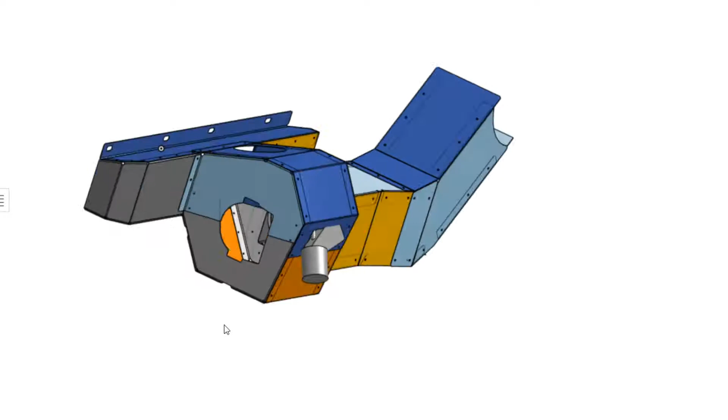There is a separate video on how to assemble or how to fold the tin for this kit, but it might be helpful to watch this video first and then have an idea about how to do that before you tackle that video with the individual pieces of tin and how to bend them. So let's look at this.

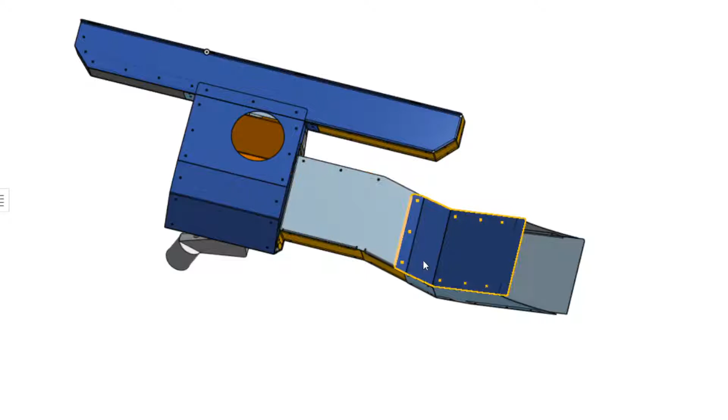First of all, we can talk about the orientation of this. If I'm looking on the top of this, I'd have the engine up above here, the valve cover. I'm looking down, the exhaust manifold for the machine would be located inside this part of the enclosure. The exhaust turbine from the turbocharger would be located inside this large box here. And then this zigzag pipe here is going to follow the exhaust pipe up to the muffler on the machine.

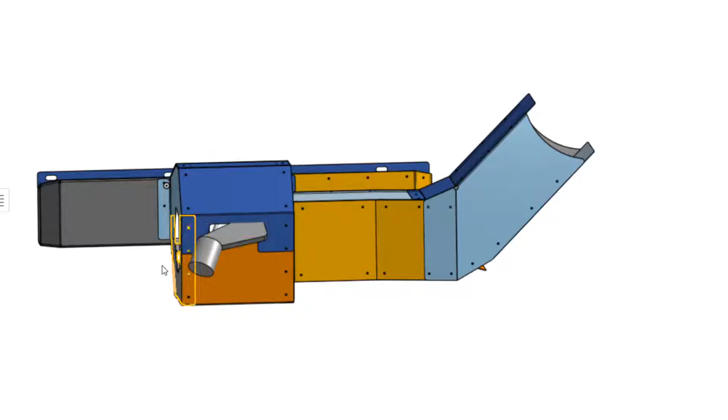What's not shown, this is only the tin, what doesn't show is that you've got a compressor turbine that's right here and a big black rubber air line leading into that, and we've got a line leaving that compressor turbine out this way, and there's an oil line that runs up through here to supply oil to the turbocharger bearing, and there's a return line to take the oil away from the bearing and back to the crankcase through there.

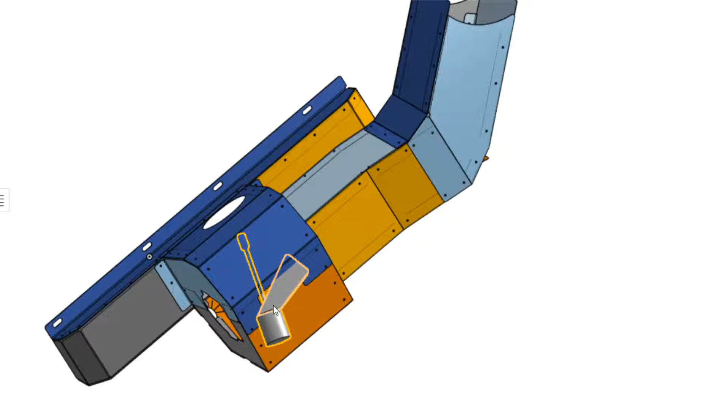We have the turbocharger bearing that runs in between the compressor and the exhaust turbine through that opening, and then we have an actuator that servos the turbocharger exhaust turbine to control its geometry here. What's illustrated here isn't actually a part of the tin kit. It's there for me to understand how to design that tin.

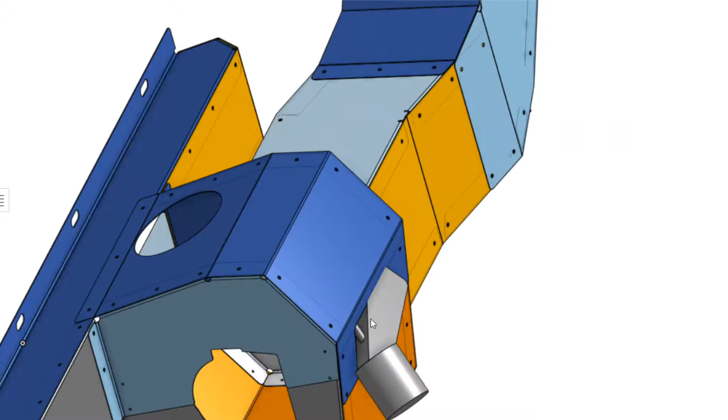So you'll have actually a cut. There's a cut shown here to fit around that. You may have to open that up a little bit to fit around that part when the time comes. So let's talk about the individual pieces of tin, and I'll talk about them in the order that I would use to install them in this case.

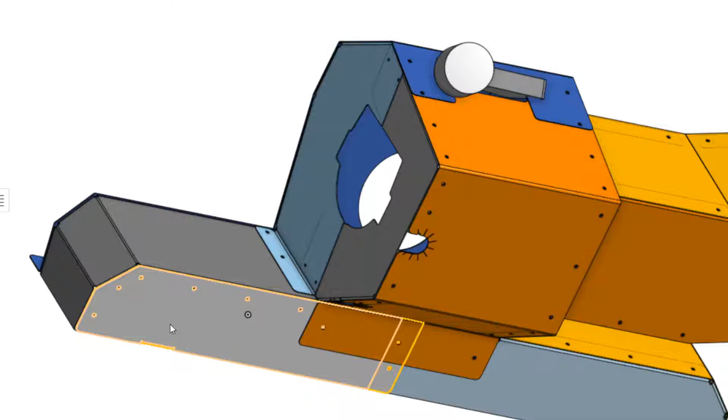We have this piece here. This fits underneath the exhaust manifold on the left side. In this case, it's pretty much a flat piece of tin. It has a tab underneath here that has a hole and a slotted hole in it. That hole is going to fit over an open hole in the block that is threaded. I don't recall for certain, but it's probably an 8mm bolt hole.

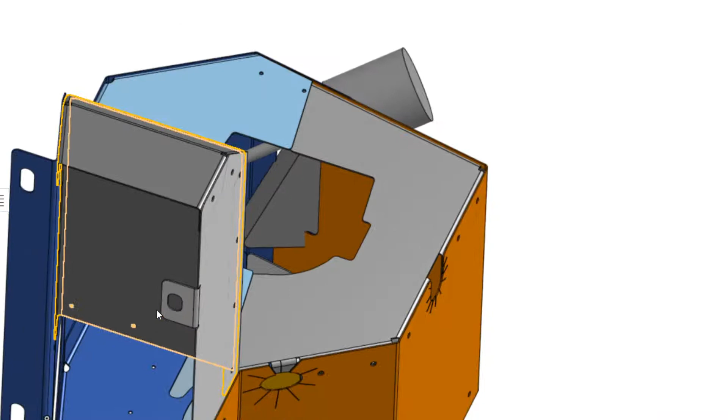And so that piece will slide in here underneath the exhaust manifold, and that hole there, you can see it when I highlight the piece, it should be over the top of that threaded hole, and we can put a bolt in there. I may provide you with a socket head cap screw, I think, for that. That will hold that on. I would put it on there and it doesn't get absolutely tight just yet, but you can put that one in place for now.

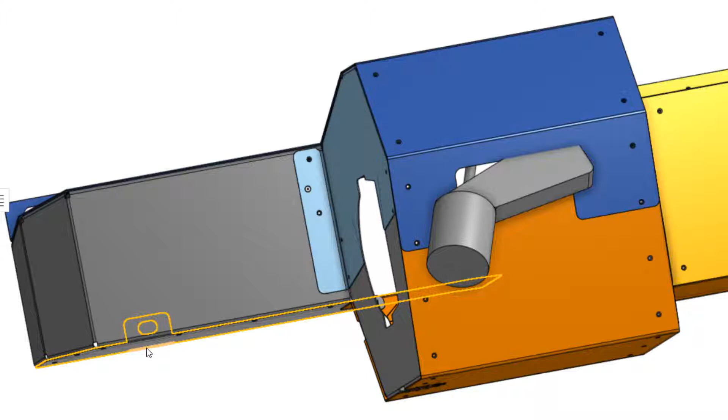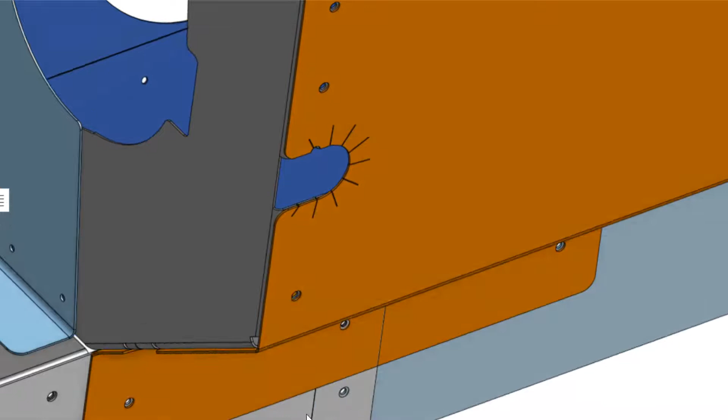Similarly, there is another piece, overlapping or underlapping piece here that fits under the right side of the manifold. In this case, the goal would be that the right-hand piece, the bluer one, would fit above or on top of the tab from this one so that the air coming across here from left to right would fly over here and not shove dust under any tab or in any corner.

So in this case, you can tell if you look at the screw holes here that the near hole, which is in the left piece, is larger.

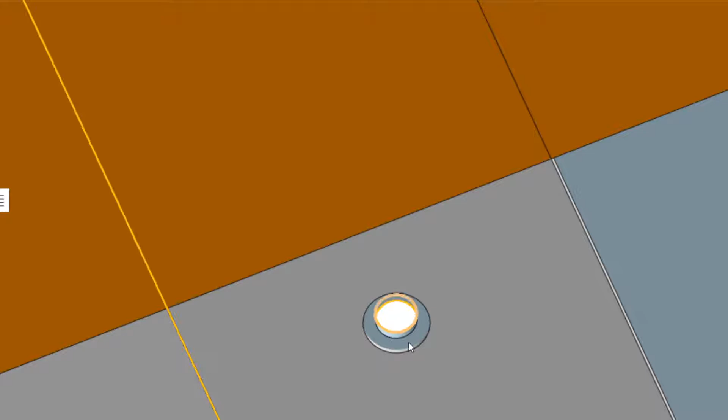That's the pilot hole for the screw to go through, and then it should bite into the sides of this back hole, which is the right hand piece in this case. So those two pieces go in.

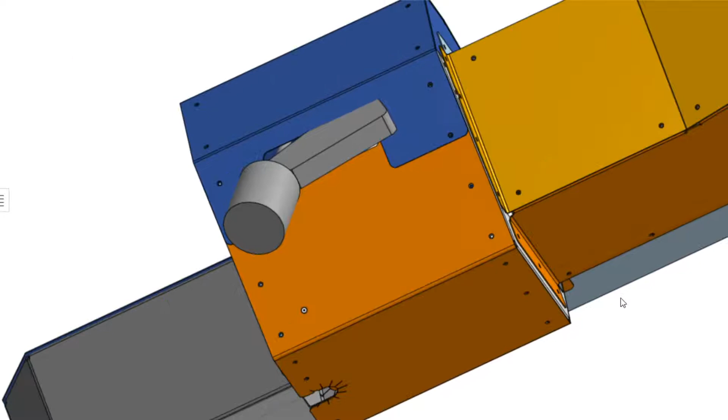This one also is going to have, on this end of it, this little tab that slips up underneath the exhaust manifold and has a hole for a bolt to hold that onto the block. So those two pieces could be slipped in place there and bolted in, screwed together and then bolted to the block. You pretty much have to attach them before we put the next piece on, because that will cover up those bolts.

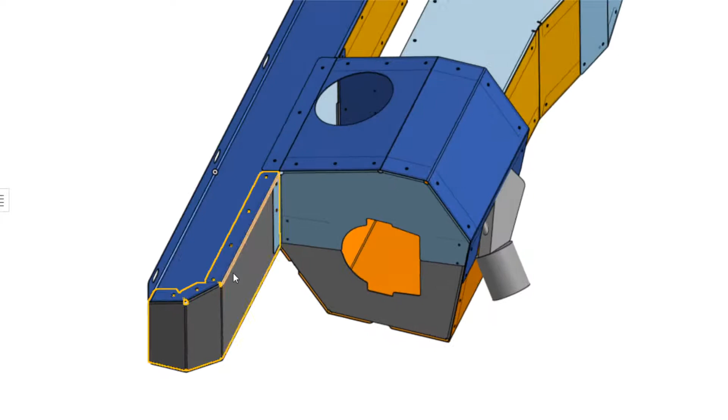The next piece to go on would be this piece here that's highlighted. It has tabs on its top that wrap around here, and has tabs on the bottom that will fit just inside the first piece. So in this case, when we have that in place, we can put screws through up from the bottom into these holes and lock those two together.

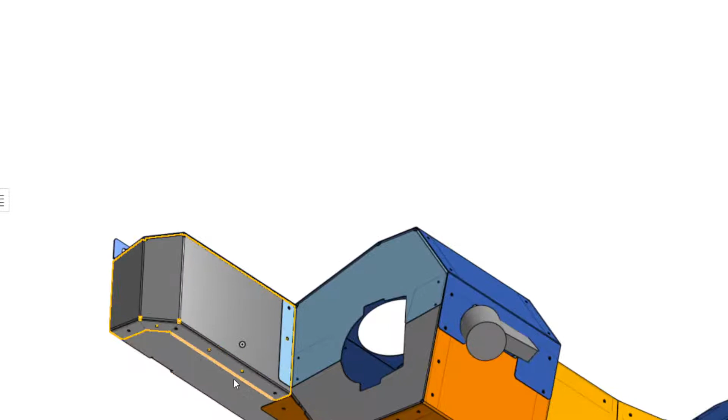Turns out that it's easier to reach this from the bottom than it is from the near side here because of the exhaust turbine and the piping and stuff that's in place here. So it's easier to reach underneath. You may have to do it by feel a little bit, but you can reach underneath and get screws started in those holes and put that piece on there.

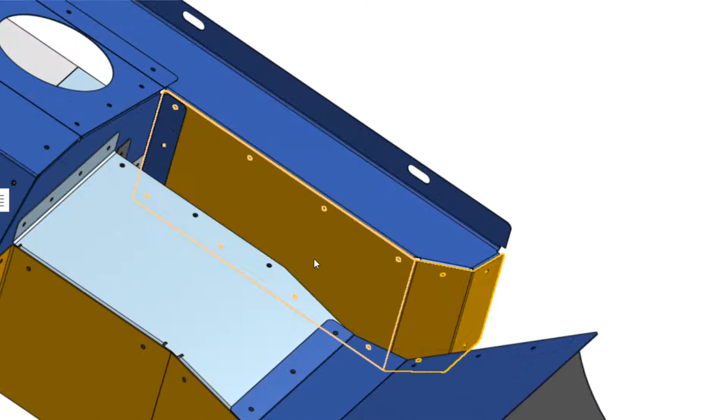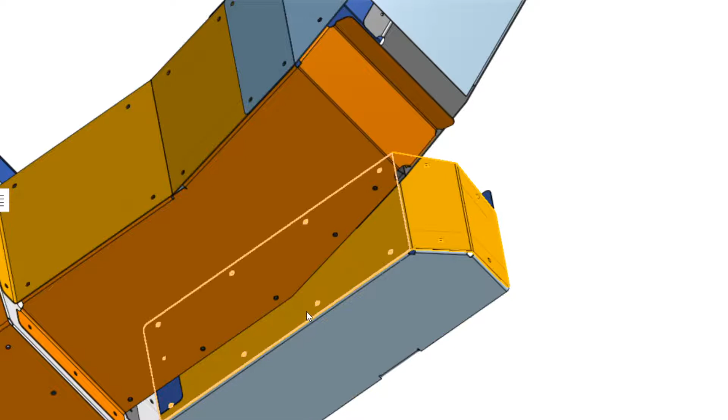Similarly, on the other side, this kind of golden looking piece will also fit over the top here and wrap. In this case, the tabs are on the bottom piece because it's easier to reach this by reaching up in here and putting these screws on, but there's not as much in the way here. So this will wrap around and we can put screws here, here, here, here around this end, and it'll hold that piece in place.

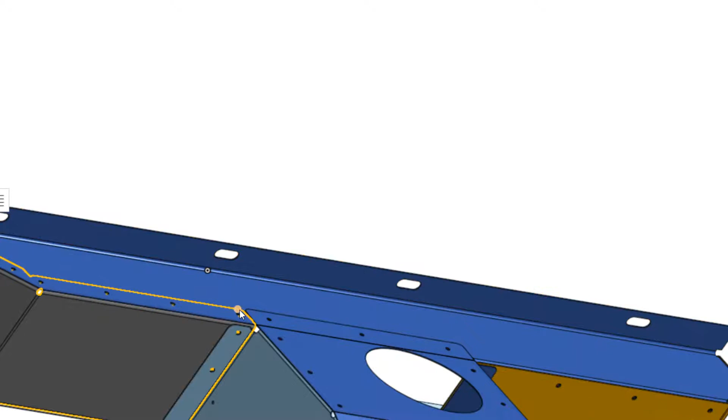Actually, with those two in place, or those four pieces in place, I guess, we could put this large blue piece that represents the top on. That'll now sit over the top of the other pieces that we've got in place, and you could put screws up this far, and on the other side, that one has a tab that wraps down, and so we'd put the screws through from the front face here and lock those all together. And then we have an enclosure around the exhaust manifold.

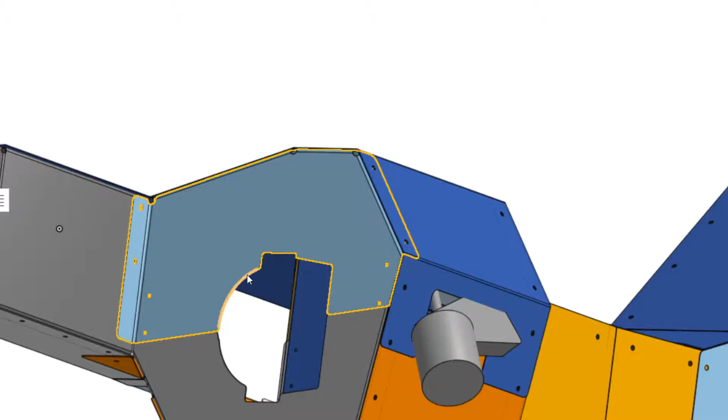Next piece to go on would be this blue piece on the side here. It's the upper half of the divider between the exhaust turbine and the compressor turbine. It'll slide down over the turbo bearing here on top, and there are two screw holes here that you can reach from out here. It may take a long screwdriver or a long driver to do that, but you can screw those onto that side panel over the exhaust manifold.

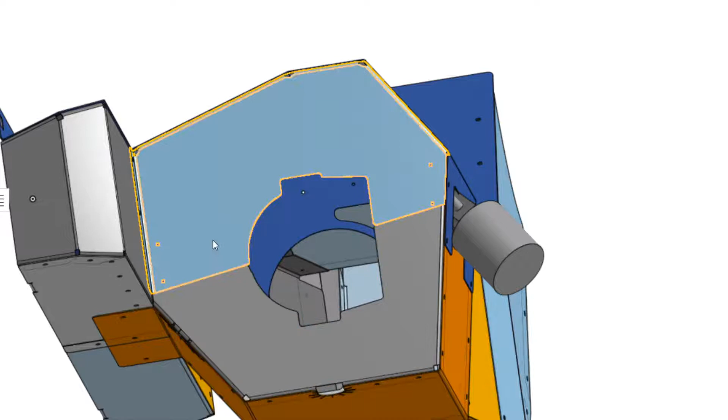With that one in place, you can bring this piece up from underneath, and it will slide inside of that blue one. We look at the holes here. These are the smaller pilot holes. It'll slide inside the blue one, and then you can put one or two or three or four, hopefully at least two, one in here and one out here, screws through from the right side to the left, from the inside of the enclosure to the outside.

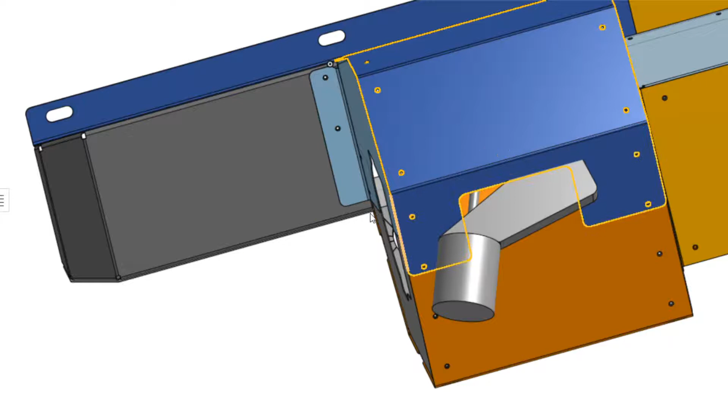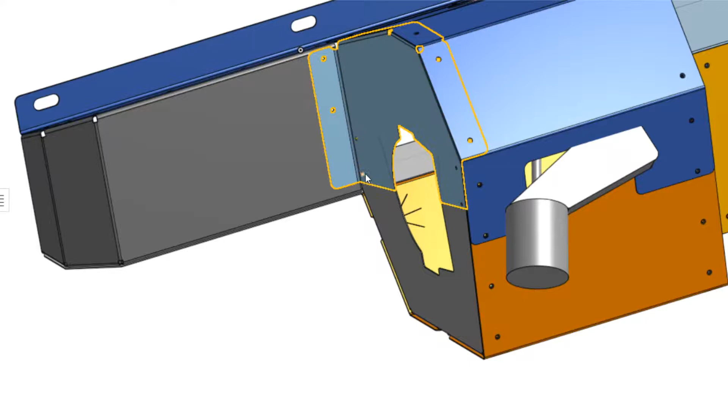It'd be nice to be able to put them on from the outside, but the compressor is going to be in the way here. So the only way to get those on is to shoot them through from the right side where it's still open, from inside to outside. If you can get all four in there, two in here and two in here, fine. If you can't reach all those and you can only get one through here and one in there, that's okay, but the more the better. So that'll tie those two together.

Then we come over on the right hand side of the exhaust turbine, and we look to put this piece that's highlighted there in place. You can see its flanges, some extend to the left and this one over here to the right.

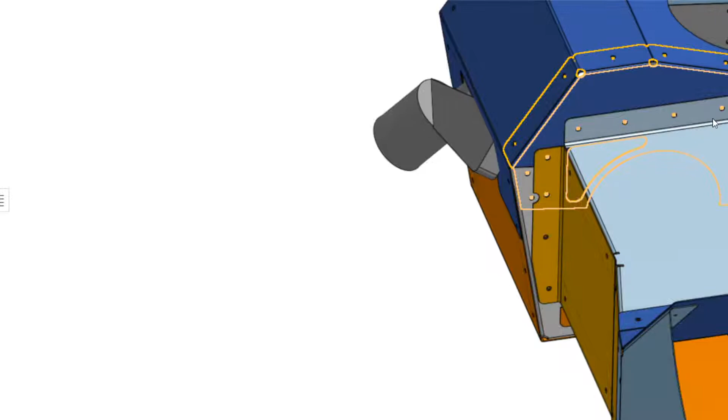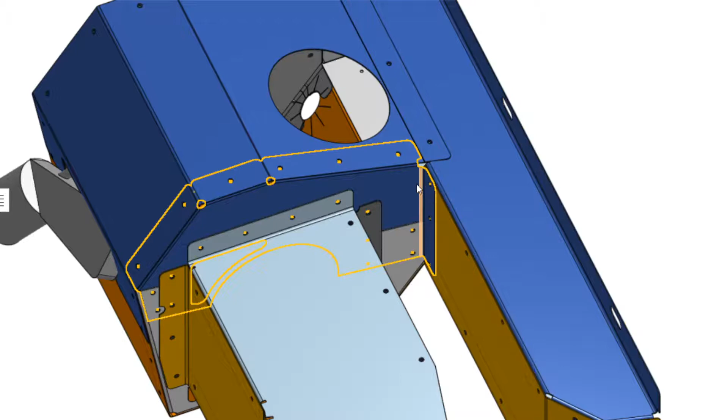Here we go. You can slip that piece down over the exhaust pipe from the top. And when you get it slid down there, it should fit around that exhaust pipe. There's two screws to put in here to tie it to the manifold cover. You get that one on, you put the matching bottom piece on.

It'll slide up around the exhaust pipe from underneath, and you can reach in from the right hand side with a long driver and put screws through here and two through the left side or the outside here. With that, we've got everything but these panels that cover the turbocharger exhaust turbine itself.

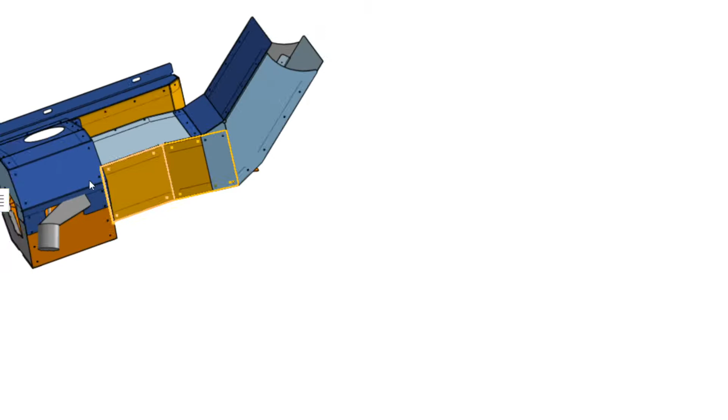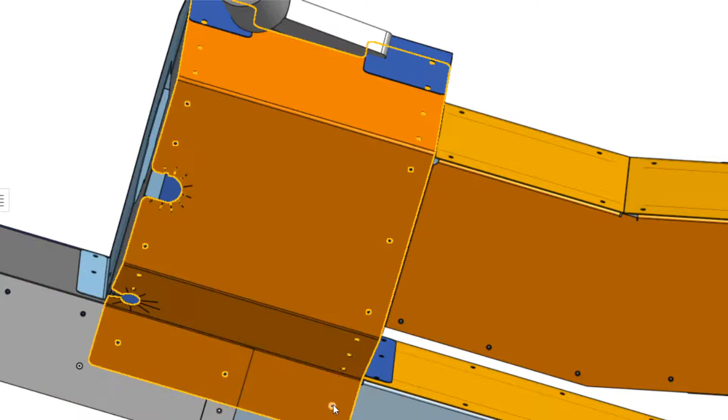So now you can put this, let's see if I can get it in center of the field of view here, this orange piece on from underneath. It will overlap the manifold cover on the bottom and wrap around here. You reach underneath and try and get these screws in. You'll probably have to do that by feel. And then the others can go in place.

Before you screw it in place, though, you have a pressure line for the turbocharger oil, the oil line to the bearing that goes up through here, and then a return line that comes down through here. And in both of those cases, you want clearance around those oil lines. So on the back one here, this is a steel line.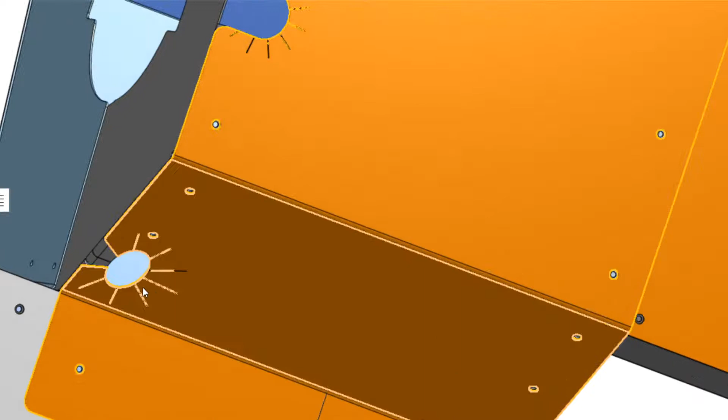You may need to open this opening up. That's why these fingers are cut there, so that you can open it up as much as necessary to give yourself some clearance around that line. You'd like these fingers to have a parallel aspect, so they're parallel to the oil line and not perpendicular to it.

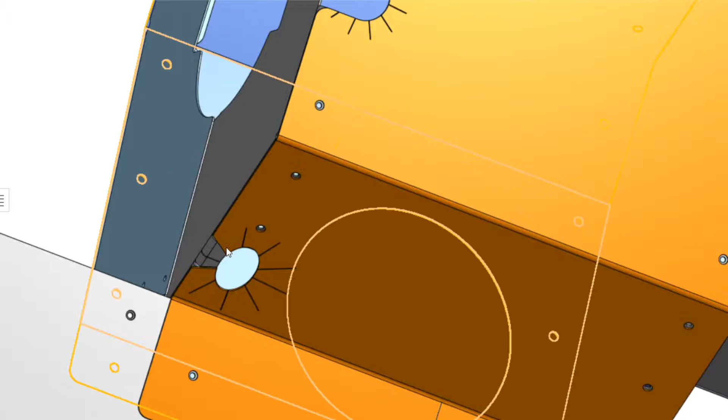You don't want anything to abrade that, so try to keep a little space there and make sure that there's nothing rough, sharp, or hard that would contact that line and potentially cause it to develop a leak if it vibrated on something. So that one, and then the one up here where the oil line returns the oil back to the crankcase. This is a larger one. It's about 3/4 inch diameter line.

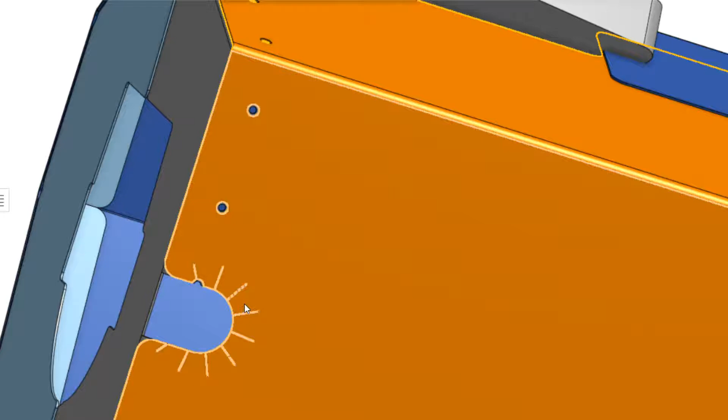Again, you've got fingers here that you can adjust or bend to give you the clearance you need around that return line. You want to do that before you put any screws to hold this in place. It may take it once or twice slipping it in place to make sure you've got clearance there.

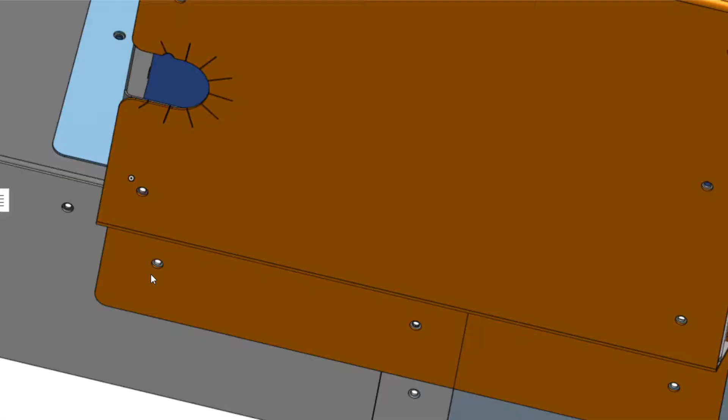And then you can put a screw through here and make sure you've still got clearance here. Put a screw through perhaps back here to make sure you've still got clearance there. And then, if you still do, you can put the rest of the screws in place to hold that together. So you can put those screws in from the bottom, hold that piece in place and wrap around here, tie it to the side panels around that area.

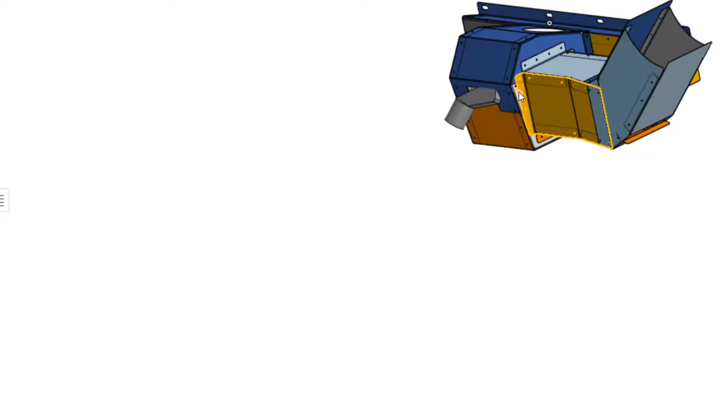And when you have that done, we can come in with the top piece, the blue piece. That wraps, let's see, get that centered here. That'll come over from the top, should wrap around that. I hope that there's enough of a cutout to fit snugly or reasonably close around this actuator that's shown here, but you may need to adjust that cut, so you could have to open it up a little bit with the tin snips. If not, great.

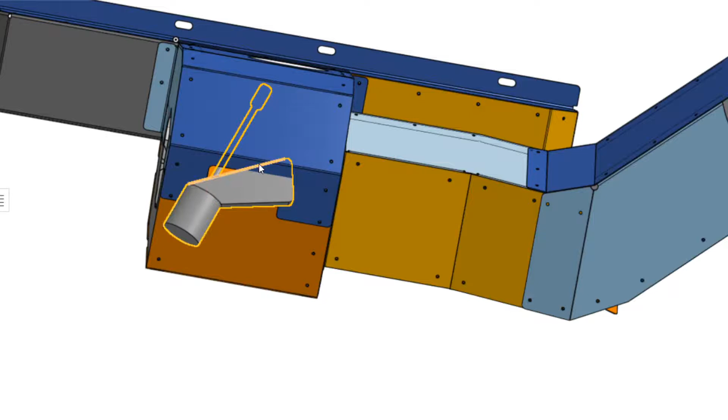If you do, fine, you trim around it, no more than is necessary to give you clearance around that component. And then you can screw that one in place. It'll screw down around the edges and over the piece from below here so that it's a relatively tight enclosure there.

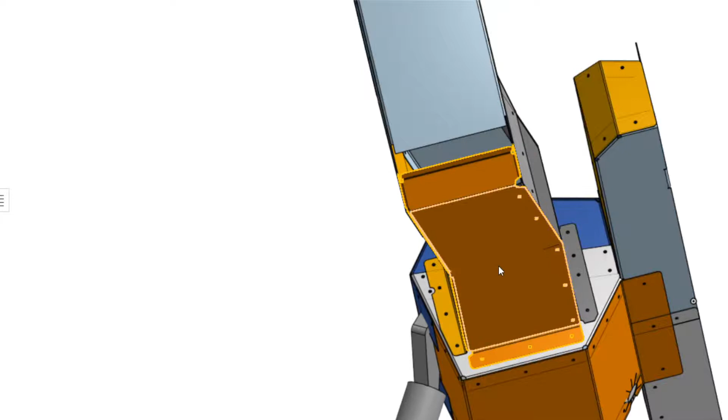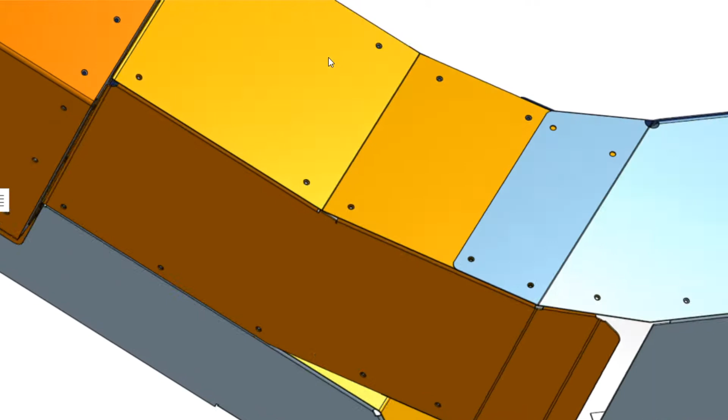The next part is to put the enclosure on around the exhaust pipe. I would probably do that by assembling this piece in back. You see this gray piece that's highlighted there with this blue piece on top and this gold piece out here. Those could actually be put together as an assembly of 3 and then be slipped down from above, from on top, over the exhaust pipe.

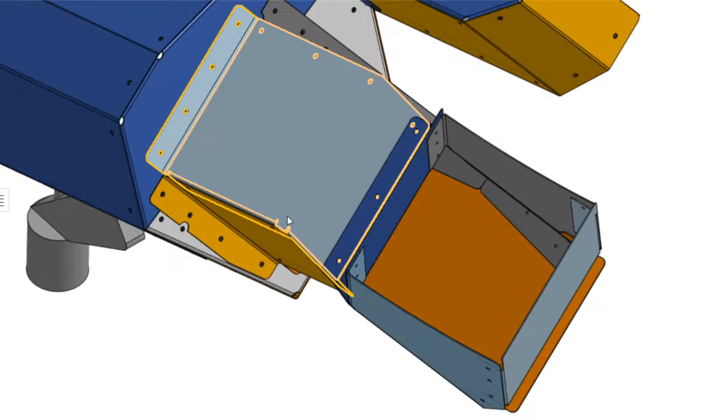And if you have them assembled together and over the exhaust pipe, you should be able to line them up with the screw holes on the side cover of the turbocharger area here and put screws through there to put on that assembly. Then this orange piece will slide up from the bottom and its flanges will go inside the U-shaped chunk that we just did. Actually, it looks like here it's going to line up and overlap flanges there, here that slides up inside, and you can put screws through to hold that piece in place.

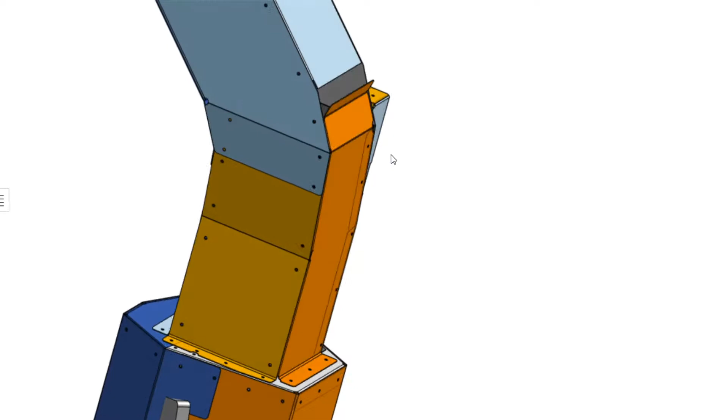It has a tab here at the outer end that you may need to adjust because there's a support bracket that comes through here, and you could have to open up or close this tab to keep it clear of the bracket, to fit as close as possible to that bracket. Okay, with those in place, let's rotate around here. Here we go.

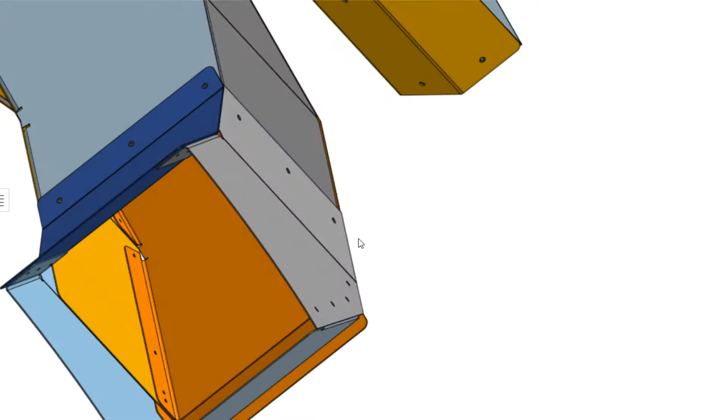And you have this blue piece that can go on the top, that just screws on here. This gray piece goes onto the back and screws on from the back there, overlaps here, and you can put screws through there. Similarly, the front piece will go on here, screw onto the existing assembly here, and you can put screws through the top into the tab underneath.

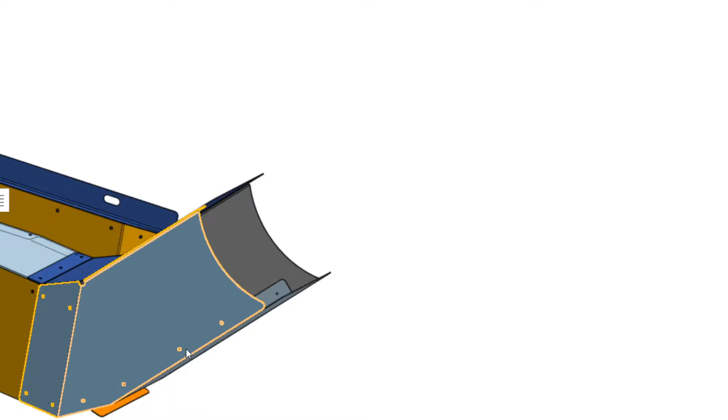And then the last piece is this piece with its 2 tabs that will fit up from the bottom, and you can put screws through from the back and from the front to tie it together. These tabs here, not really tabs, but these remaining ends of this top piece and the bottom one underneath here, you can bend those to fit up against the muffler that's right out here. This should kind of parallel the muffler, which runs perpendicular to this assembly. And so you can open these up as necessary to fit up against the muffler.

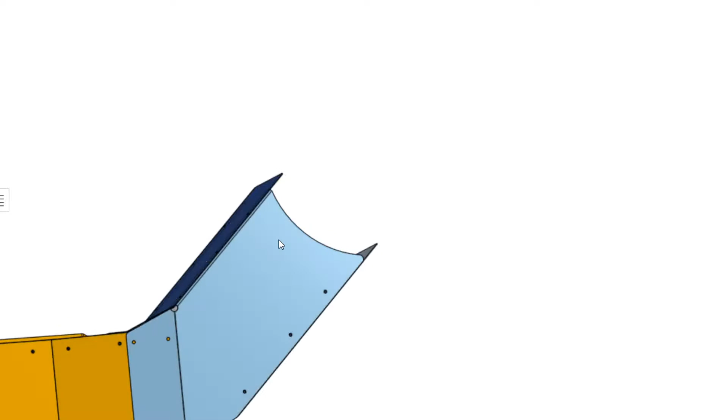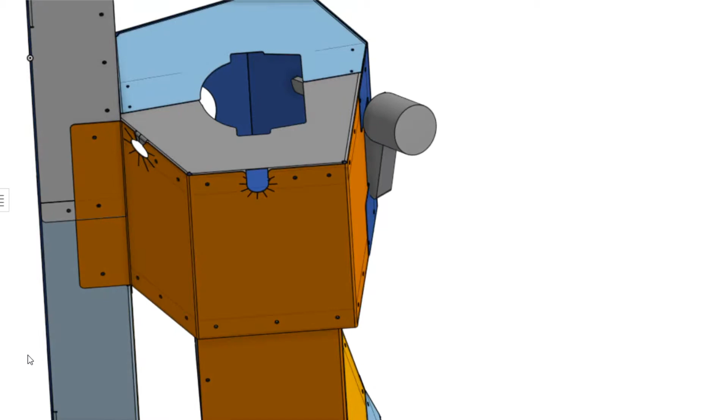That's the assembly of the tin itself. Last things to consider doing is tightening up any places where you've got large air gaps. We can do that with some of that stiff tin foil tape that we send with the kit. If the hole has gotten large around this oil line, you can plug that up by taping around it with some of that aluminum foil tape. It won't hurt anything to tighten that up, and then we don't lose too much air around that location.

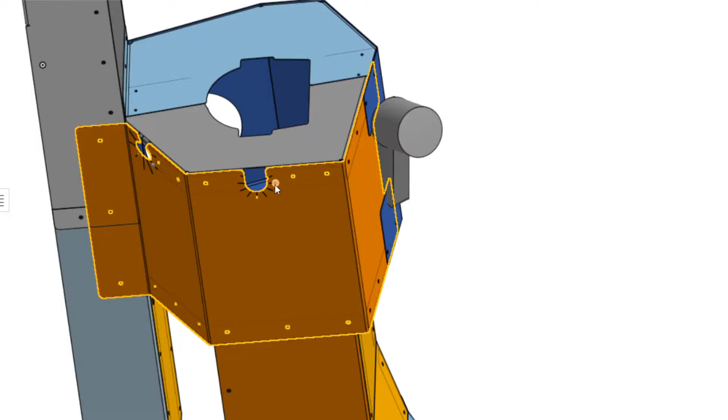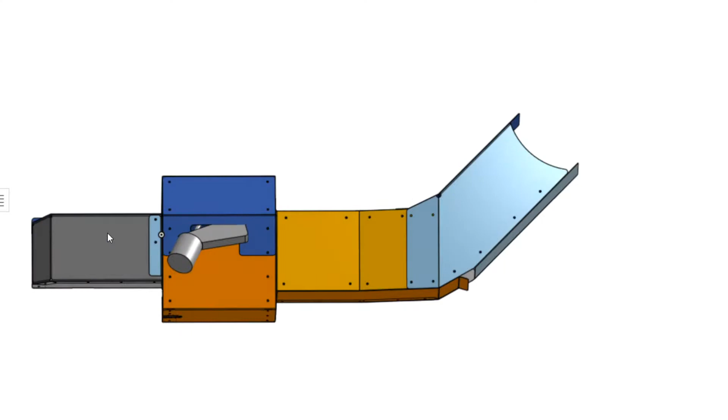Similarly here, if this hole has gotten larger, maybe you had to shift it because they moved the oil line a little bit on yours, we can tighten that up with some of that tape. You can tighten up around this assembly here with some of that tape if necessary. We also tend to use that tape like Loctite over the screws on the larger lines of screws on the kit, but you can see that in the other videos about the installation. So that's the tin kit for a 7120 Case combine. If you're looking at that, this will help you in understanding that tin before you tackle it.

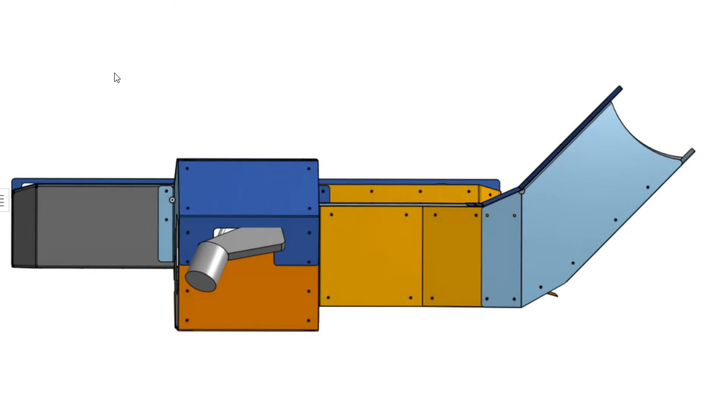I tell everybody at the end of these videos that while this kit will greatly reduce the number of smolders you might experience in a volatile crop such as sunflowers or canola or safflower or even soybeans, I can't guarantee that you'll never have a fire in your combine. You can still have a fire start from a stray spark from a failing alternator, an electrical short, a hot bearing, or any other source of heat or spark on the combine. But it will reduce the chronic fires so that your combine acts more like it's combining corn or wheat than if it was combining flowers.